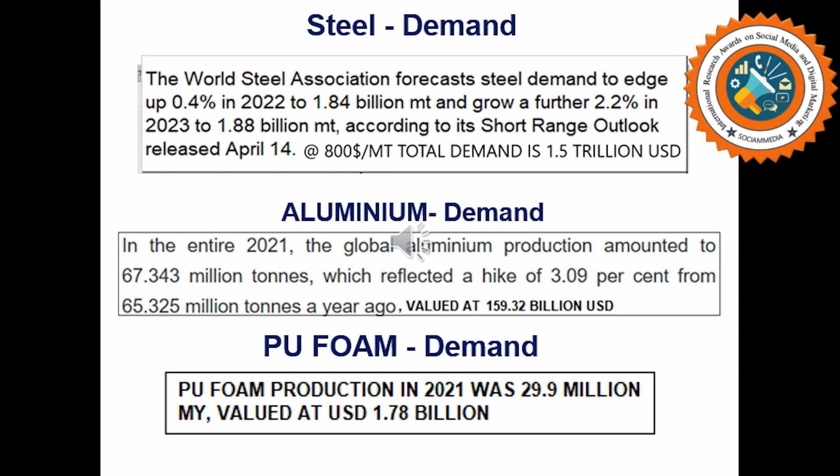Whereas aluminum has a global production in 2021 amounting to 67.343 million tons with a hike of 3.09% from previous year, valued at 159.32 billion US dollar. The composite material PU foam has a production of 29.9 million metric ton in 2021, valued at 1.78 billion US dollar.

To achieve better strength to weight ratio, the steel and aluminum envelopes selected are of high strength grades. The steel with Fe 310 to 550 MPa, megapascal strength, and it is of light gauge between 2 to 4 millimeter thickness, and to achieve 30-year corrosion resistance performance, it is with galvalume coating. The aluminum envelope used is of high strength grade AA6061. The thickness used is 2 to 3 millimeter.

Coming to the infill material, concrete and steel composites have been in vogue since 1950s, concrete being the infill material and steel contributing to the tension of the members. After 2000, rigid PU foam, polyurethane foam applications have taken pace, even though foam as a structural material has been investigated since 1970s.

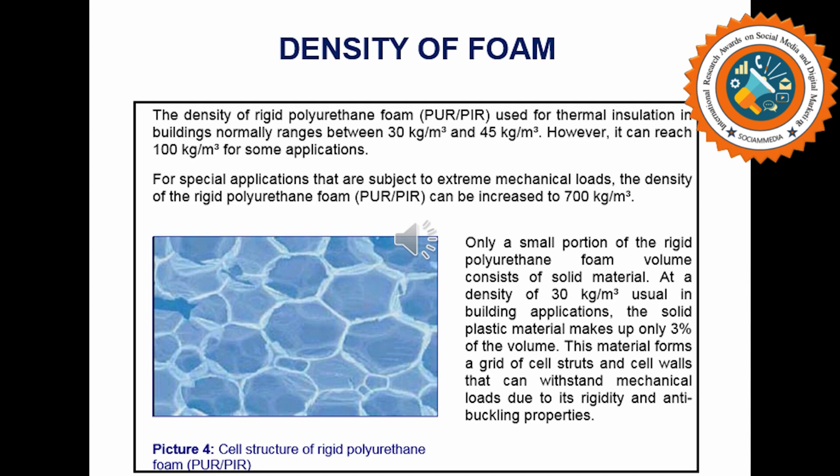This material combination using steel and aluminum envelope in composite action with high density polyurethane foam as infill material offered improved average strength to weight ratio of 60 times compared to RCC and 40 times compared to steel, tested as structural elements subjected to compression and bending.

Coming to the sustainability, which is a parameter nowadays mandatory and very important based on BREEAM, that is Building Research Establishment UK, LEED USA, Green Star Australia, etc., with about 20 such sustainable goals based on carbon dioxide emissions, waste generation and recyclability, environment impact, workability, safety, and overall economy. The BREEAM rating, for example, is supposed to be excellent when it is greater than 85% in score.

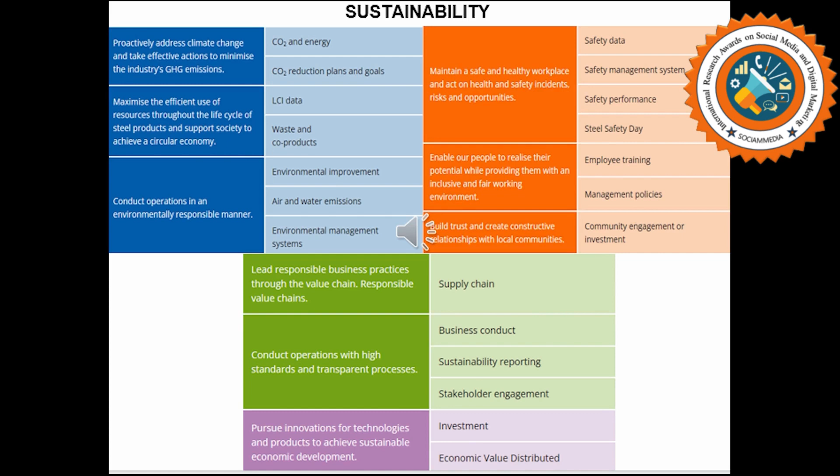One of the notable examples of the sustainability of steel is the Cooperative Group headquarters building in Manchester, UK. This building, providing 30,000 square meters of office space, was constructed with 2,000 metric tons of steel framing, and all the facades as well as roof atriums were with glass. The building was completed in 2013 and stands testimony for a decade of successful performance.

So far as sustainability of aluminum and foam are concerned, the external envelope comprising of the entire roofing, the wall panels, shading devices, door and window frames, and facades. In all these areas, the use of aluminum in composite action with foam as an infill material for sandwich panels is ideally suited. The foam offers both stiffness to the panel as well as insulation properties for the envelope.

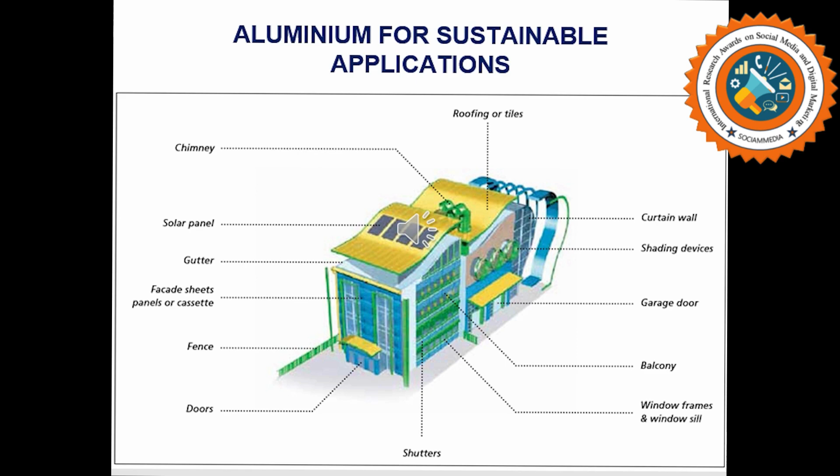In addition to the stiffness and insulation to the structural members, the PU foam also offers sustainability attributes like good fire resistance, negligible water absorption, energy conservation, safety and workability, in addition to less carbon emissions.

Having established the successful performance of the innovative composite with high strength steel or aluminum envelopes of light gauge and infill PU foam of PIR, that is polyisocyanurate type, with better strength and fire resistance, we are now pursuing the investigation of slenderness aspects such as B by T, that is width to thickness, and L by R, length to radius of gyration, ratios of structural elements, and diaphragm action of frame infill panels. Panels can be for walls or floor. The connection aspects of the application are also being taken up in two ongoing research projects.